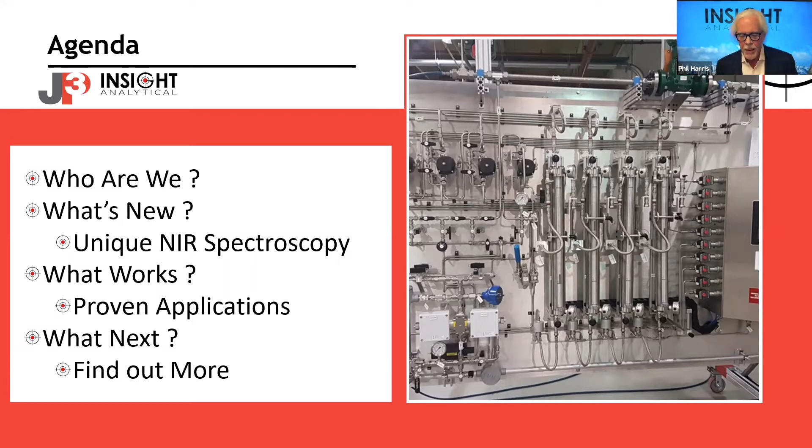So as far as who we are, as Chelsea said, there's kind of three players here right now, if you like. JP3 is, as Chelsea mentioned, a subsidiary of Flotek, and it's an equipment and information company that develops and sells online analyzers and data analytics. And so, they do a cloud-based data platform where you can see real-time what's going on in all of your processes that are being monitored by this technology.

And JP3 brought to the industry really a new kind of unique measurement technology that enables radical efficiency improvements, especially in applications where traditionally it's been difficult to put analyzers because they're being installed in remote facilities. Insight's a Canadian company and we work with them. And so a lot of our installations are up in the far north. There's not a lot of instrument technicians there. Often if you want a guy in, it's a 6 or 8 hour drive. So one of the unique things about this technology is the fact that it has almost no maintenance.

So Insight, we've worked with JP3 since 2013, I think. I started doing consulting work with them, and then we helped bring this technology to Canada. And Insight's a systems integrator, distributor, and a technology development company, and JP3's business partner. And as Chelsea mentioned, Making Measurements Matter is something we've been working to put together to try to bring educational seminars, webinars, and training to the measurement industry globally.

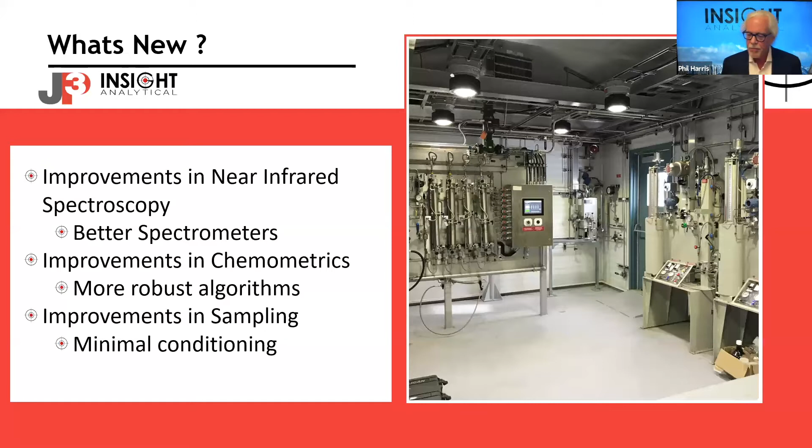So the first thing I want to talk a little bit about is just the type of spectroscopy we're using here. I'm a spectroscopist by trade, so to me, this always seems like it's second nature. But I like to try to put a bit of an explanation into this for how spectroscopy really works, and specifically how absorbance spectroscopy works.

Oops, let's change my pen color here. What color am I going to use to write on red? Oh, I'm going black.

Okay. So when we talk about absorbance spectroscopy, what we're talking about is shining a light through a sample, as I'm trying to indicate over here, and seeing how much makes it through on the other side. And so at first glance, you might think, well, if I wanted to determine how green something was, I would measure how much green light it transmits. But a clear glass window transmits green light as easily as a green piece of colored glass does. The difference is the green piece of colored glass transmits green light, but it blocks blue and red.

So when we look at something like some green food coloring or a green piece of glass, we see it as green when the light shines through it because it stopped the red and the blue. So this is what I'm trying to show here, is that it transmits green light and it blocks the red light and it blocks the blue light. So we can identify that something is green by looking at how much blue and red it blocks. And that lets us figure out what colors it's actually transmitting and how we would see it.

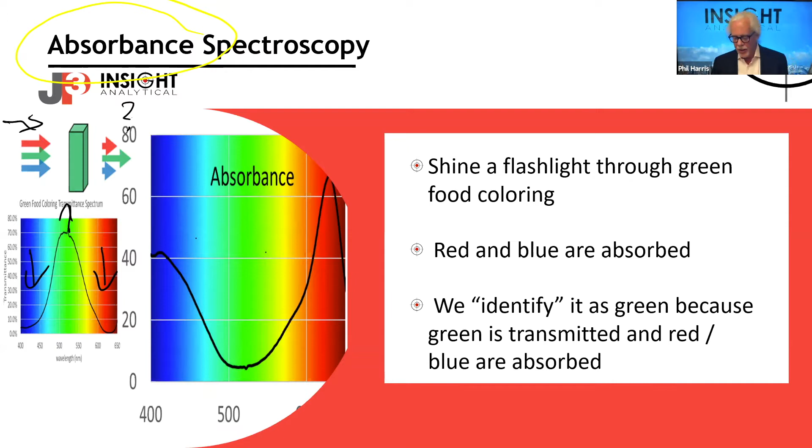The problem is when we start looking at some hydrocarbon samples like crude oils and things like that, they don't transmit very much visible light. So we have to start looking into different parts of the electromagnetic spectrum. We look at different wavelengths. And so what I'm trying to show here is that if you take something like, let's say, a crude oil, and you try to shine visible light through it, it would absorb and block almost all of that visible light.

This isn't a crude, it's a natural gas condensate, but it's a heavy condensate right off of a condensate stabilizer. And so you can see it doesn't transmit much visible light. It's very dark. But as we go beyond the red end of the spectrum, and we get into what we refer to as the near infrared, near because it's near to the visible, infrared because it's beyond the red, we start to get less and less absorption, and basically more light makes its way through.

And there's a couple of places where the hydrocarbons absorb light. But once we get out to about here at about 1600 nanometers, that's where all the magic starts to happen. We start to get all of this absorption of light again. And from the pattern and shape of that absorption, we can identify what hydrocarbons are present. And from how much of the light's been taken away, we can identify how much of those hydrocarbons are present. So we can do qualitative measurements, what chemicals are there, and quantitative analysis, how much of them are there.

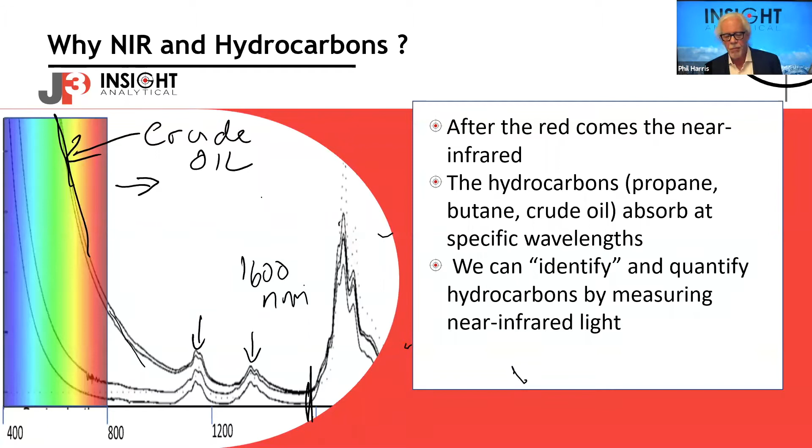So this isn't new, okay? Infrared spectroscopy has been around for a long time. Coblentz around 1900 built a big spectrometer the size of the room that I'm in, and he was using it to look at the infrared spectra of different hydrocarbons, and he was basically the first person to come out and say, as we change the shape and the number of molecules that are in them, the spectrum changes, and no two spectra are the same for two different chemicals. So we show an example up top of gas phase methane and gas phase ethane, and you can just see how differently structured their spectra are.

Around the 1950s, people started to try to apply this technology to actual process measurements, especially for determining water content in things like food, in things like oils. They would look at how much light gets absorbed by water at a certain wavelength and identify how much water was there. In the 1980s or so, fiber optics became more popular, and people started developing FTIRs or FTNIRs. FT stands for Fourier transform, NIR, near infrared. It was a great Canadian thing. There's a company out of Montreal called Bomem. They later got purchased by ABB, but they were a big foundation of the development of a lot of this technology.

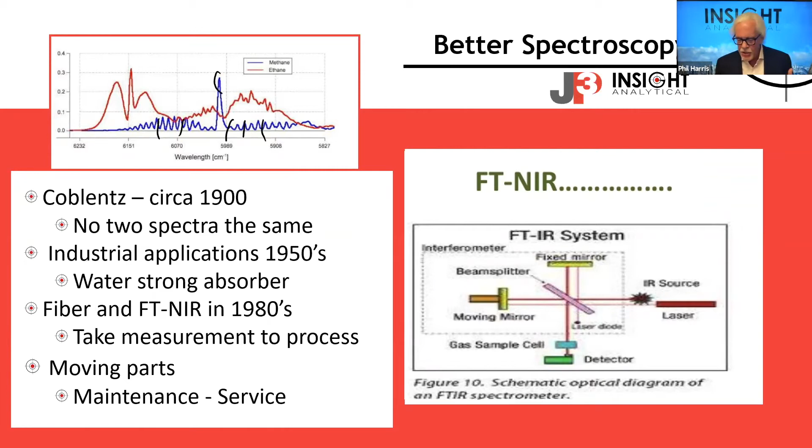And this led to a lot of work on distributed feedback type lasers and bright, intense light sources that were extremely monochromatic, all one color. They're extremely bright, and they could be mass produced to be very similar. As the telecom industry expanded, they said, we want to be able to run more than one color of light down the fiber. We want to be able to do different wavelengths. This is important to us because we want to look at different wavelengths or colors of light and see how much light's getting absorbed there. So the fact that they could tune these lasers meant that we could start to do spectroscopy with them.

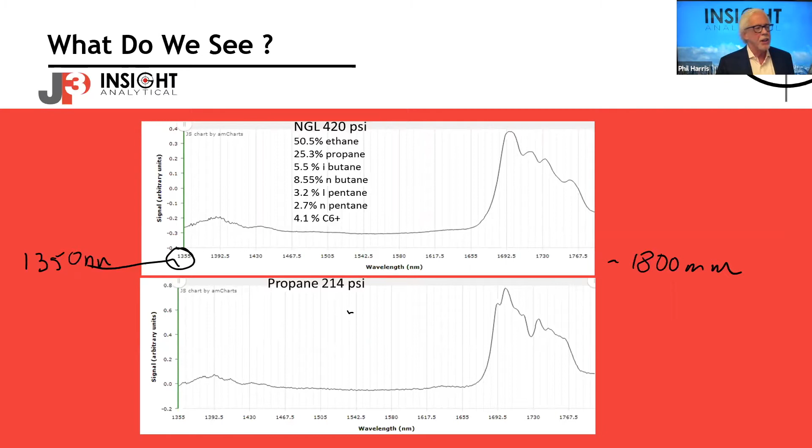Oops, I'm just going to go back for a second and come back into this, as I want to talk about this top spectrum. It's going to automatically update after about 30 seconds. So the top one is a sample of natural gas liquids. The bottom one is a sample of pure propane. And to the naked eye, our pattern recognition skills are pretty good. We can tell the difference between those.

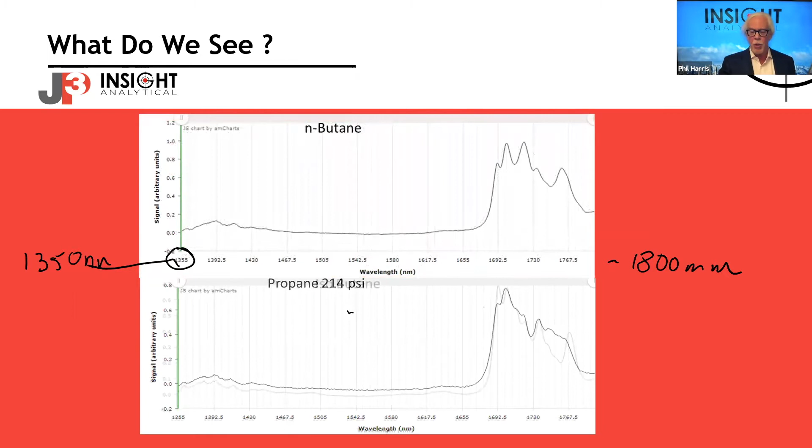You could look at those and say, I can tell the difference between propane and NGL. I can tell the difference between propane and n-butane. I can tell the difference between propane and isobutane just by looking at the spectrum. Where it starts to get complicated, though, is in the real world. We end up having samples that have a mixture of components there.

So now we end up with something like a stabilized condensate or a natural gasoline, and it has a mixture of chemicals, and all of those spectral features, spectroscopists often refer to them as fingerprints, all of those spectral features start to overlap on each other. And suddenly our naked eye visual processing isn't so good at determining what's there.

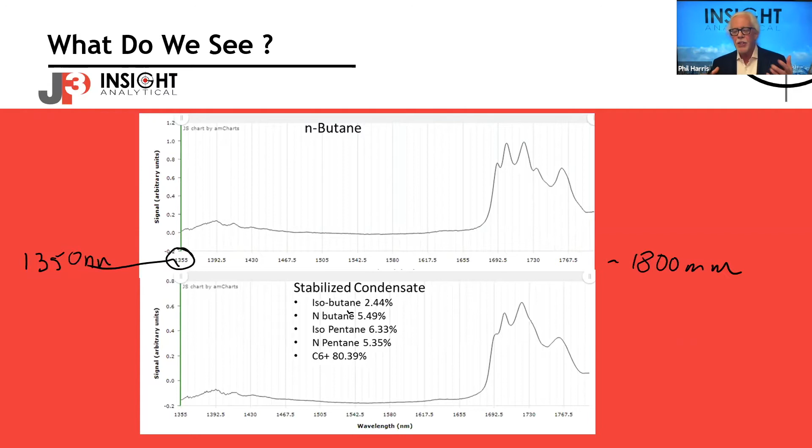But another enabling technology which has been developing over the last decade or two has been the things that we can do with pattern recognition. So in chemistry, we refer to it as chemometrics, and it is the art, if you like, of using numerical analysis, using the ability to look at patterns in data, and from that extract meaningful information. Chemical composition, physical properties.

So the enabling technologies that have allowed us to improve how the chemometrics is done has been the massive advances we've seen in computer speed. They talk about the speed of computers doubling every couple of years. My cell phone now has infinitely more computational power than the first personal computer I had. So we have these very fast computers.

When I was going to university, a long time ago, you don't get white hair like this for nothing. When I was going to university, artificial intelligence people were saying, well, we don't know if we'll ever fully be able to interpret human speech with a computer. Well, of course, kids' toys do it now. So we've seen this ability to take patterns and waveforms and make it into actionable data.

So that's what we do with chemometrics, is we apply that pattern analysis to chemistry. We use the spectral data, the shape of that curve, to determine chemical compositions and/or physical properties. So by combining the improved spectroscopy with better chemometrics, we can get better information. So those two pieces really enable us to take the spectra that we measure and make it into information.

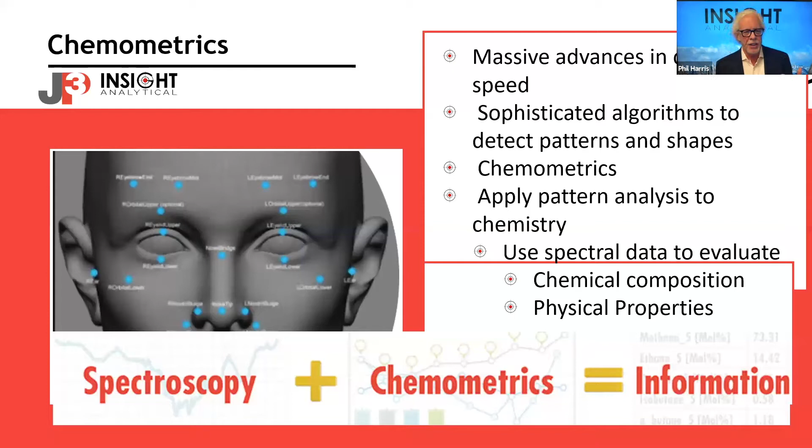But what we know in the process industry is that one of the big difficulties is, how do we get a good sample to the analyzer? And how do we keep the analyzer up and running? Sample conditioning. So one of the things we had to consider then also is, how can we make that whole process of having a sample flow over to the analyzer easier?

We say 80 to 90% of the problems that happen in analyzer systems are related to sample systems and trying to get the fluid to flow through that product. And so what we want to do then is try to minimize the complexity there. We want to minimize the amount of filtering we need. We want to minimize the use of regulators, valves, and small tubing.

That helps reduce all of our maintenance requirements, keep everything as simple as possible. And then we want to take that solution and close couple it to the process we want to measure. And that allows us to get faster response times. Faster response can often lead to better process control.

So what I'm showing here is a typical sort of analyzer sample system. And this is probably not a typical GC oven, but it's the sort of thing we see in GC ovens. There's a lot of small tubing in there, complex flow paths, potentially difficult to maintain. We certainly have to do a lot of training for instrument technicians to work on these things.

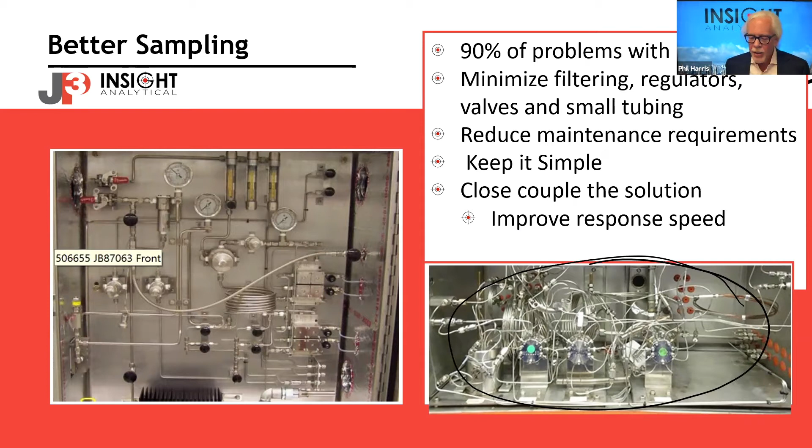So what if we could make this simpler? What if we could make it so that we have a flow cell that has all half-inch ports? So all of our flow paths can be on half-inch tubing and half-inch pipe. What this does for us is gives us large diameter tubing, large diameter piping that is going to be less likely to plug by the dirt and the wax that might be in something like this.

Inside that flow cell, we have ports so that the fluid we want to measure can flow through it. And into that flow cell, we put 2 sapphire cores. We use synthetic sapphire. It's the second hardest thing next to diamond. So I'm going to make sure I can see this. So this is an example of a cutaway of the flow cell.

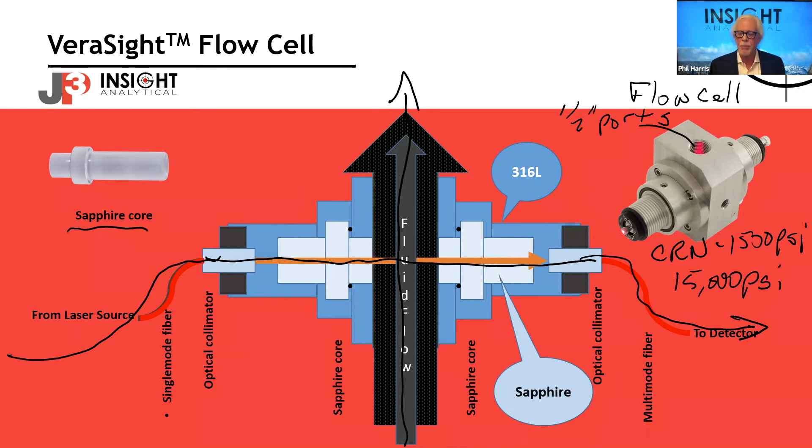So this lets us kind of change how we approach measurement, if you like. We take a process pipe, put a probe into it. We look for some source of differential pressure. This could be from an orifice plate, could be a control valve, could be a pump. It could just be a low pressure return someplace. We want to use process differential so we don't have any pumps in the system.

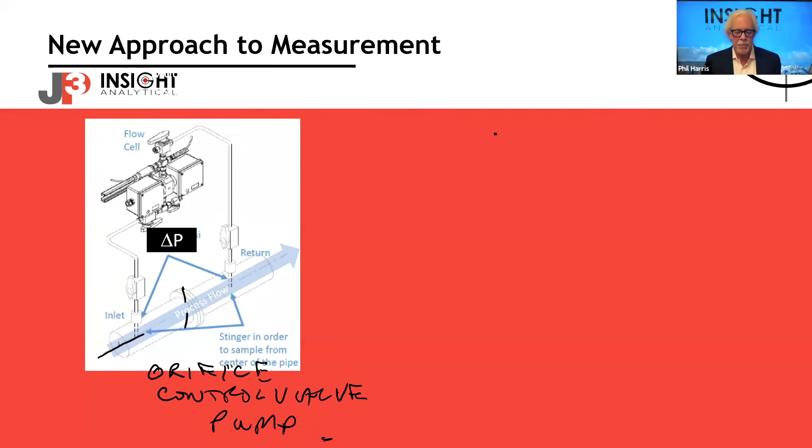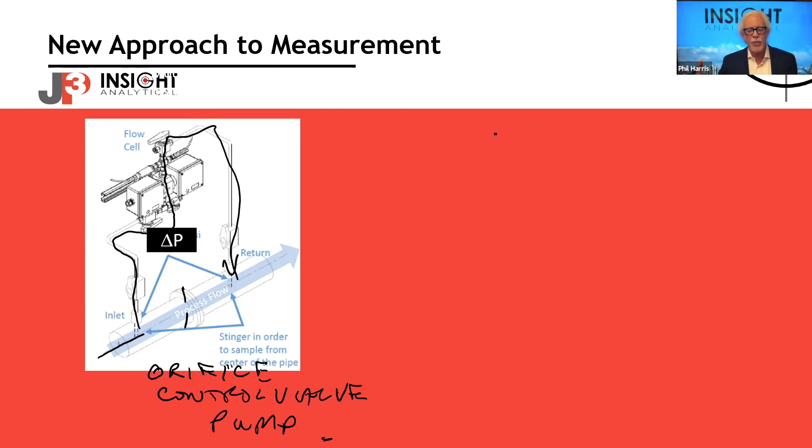We mount that cell as close to that process pipe as we can, and the differential pressure runs through some half-inch tubing and drives flow through that flow cell. So we have the flow cell, and then remotely, we mount this analytical device that contains a spectrometer, and we connect it by fiber optics. The fiber optics shoot a beam of light out through the flow cell and return it back to the analyzer. I kind of view this as where the actual measurement happens. It's where the light interacts with the sample, and this is where the brain is.

Because no process fluid runs back to where that brain is, we don't need any specialized analyzer buildings or shelters. We can mount this in an MCC building, in a control room, in a blending skid room, and put the brain part any place because we don't bring process fluid back to it. This minimizes risks to our staff. We don't have sour gas or sour liquids coming to it. We don't have hydrocarbons coming back to it, so we don't need gas detection and protection against possible combustion.

And so now we bring that information that happened when the light got absorbed by the hydrocarbon back over to the brain. We measure that spectrum, and we use those chemometric algorithms to convert that into actionable data. We look at that spectrum and we say, this is the chemical composition. C1 through C6 plus, C1 through C9 plus. These are the physical properties: vapor pressure, BTU content, API gravity, cloud point. We can do this in gases or liquids. The same technology can be applied to pretty much any type of fluid, from a light NGL to a natural gas to a crude oil to a natural gas condensate.

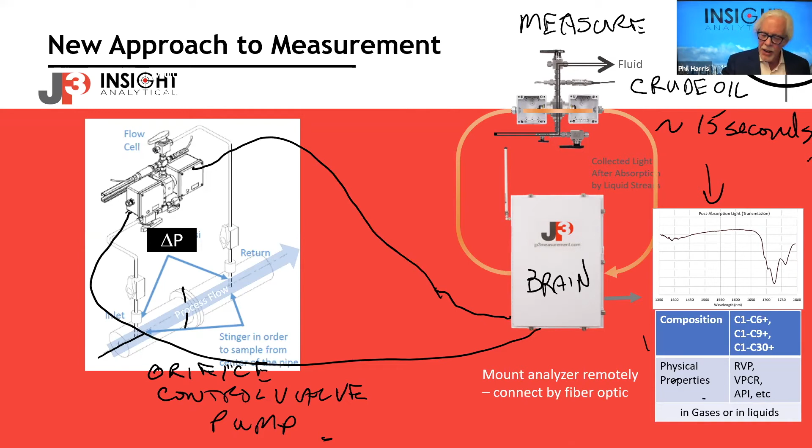Hi, Phil. Sorry to interrupt you. We've got a question in the chat. Okay, perfect. So I'm not sure who it's coming in as, Sandy one. So Dave, okay, not Dave. Sorry, guys. If this isn't clear enough for you, please pop off mute and just get some clarification with Phil. This is not my field.

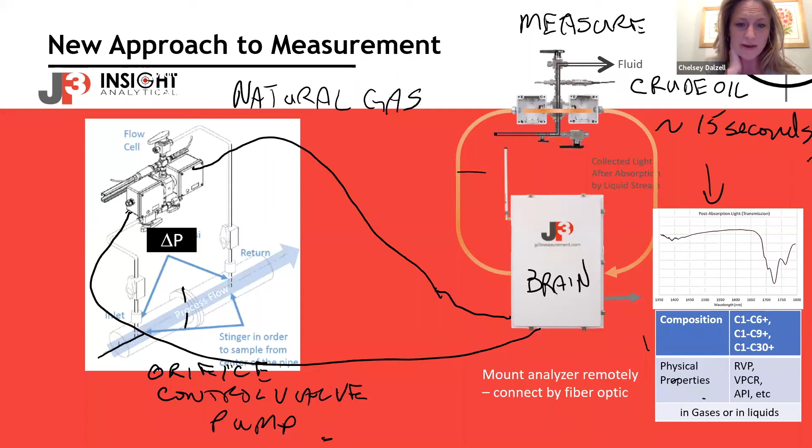So if delta pressure across the flow cell is higher than delta pressure in the main process line, how does the fluid return back? Yeah. Okay. So that's one of the things that we have to look at when we do an application review, if you like, is what's the pressure? I need to know the pressure at the sample point, call it P1, and the pressure on my return point, P2. And we need to ensure that P1 is always greater than P2.

Well, actually, I suppose that's not even really true. It's just ideal. If P2 became greater than P1 for some reason, we would just get flow in the opposite direction through the flow cell. But it's basically an unrestricted flow typically, without necessarily a flow limiting device there. Ideally, if we are going to put a flow limiting device like a needle valve in here or a flow restriction, sometimes we just run narrower tubing on the return side. We would put it on the downstream side for a liquid because we want this cell to stay at pressure. Keeps the bubbles in the liquid so we don't have any bubble issues.

We still have to look at applications. This analyzer is designed to make single phase measurements. So if you're going to do a liquids sample, it should be all liquid with no gas bubbles. If you do a gas phase sample, you prefer it to be all gas phase with no liquids there.

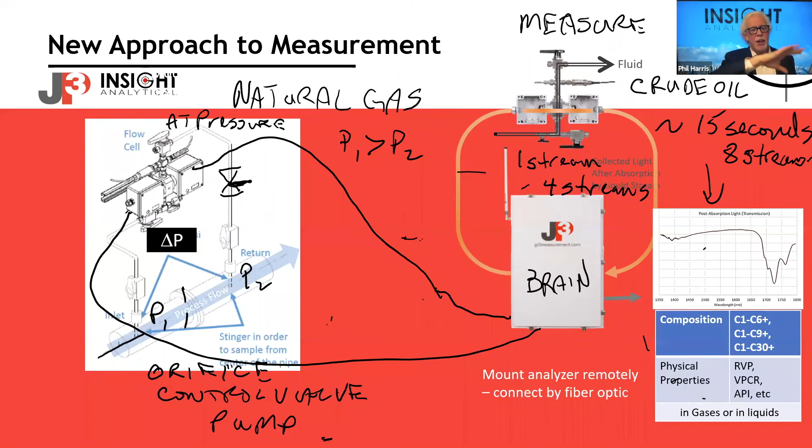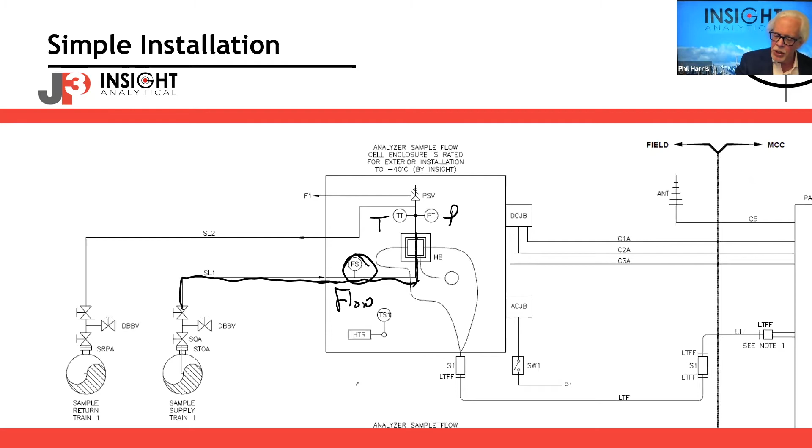So this ends up making our installations quite simple because we don't have a lot of equipment on the sample conditioning side of it. So I show a typical P&ID. Hopefully this shows up well over the screen; AutoCAD drawings and all those skinny lines are often tough. But we have a sample point here with a double block and bleed valve or assembly. We come in, we go past a flow transmitter, flow through the flow cell, we have pressure and temperature, and return back to the process. So that's our complete flow path.

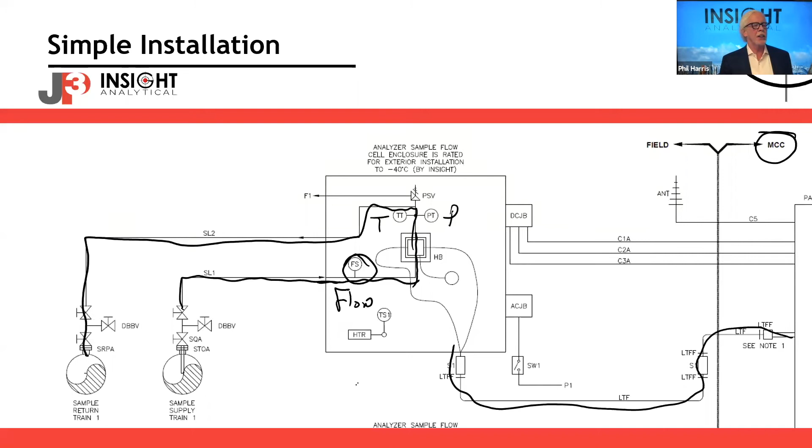Now we may add things on there like lab grab sample points, and that's typically what we do. So this is probably a simplified version of this P&ID, and I'm going to show you an actual cabinet in a minute. But then we run fiber out from wherever we put the analyzer. So our fiber optic comes in, and in this case we'll often put it in something like an electrical building, an MCC building, a control room, any place else. Again, no process fluid is coming back. All we have is fiber and some analogs and some digitals, so some communication that goes back and forth, and the fiber optic connection.

Oh, sorry, excuse me. Hit the wrong button. There we go.

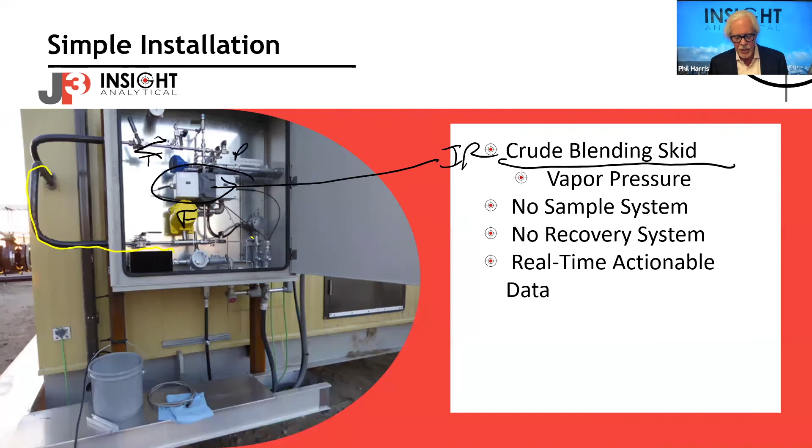So this crude is coming out. It flows past this yellow device that you see right there, which is our flow. The infrared cell is right here. Temperature, pressure up here, and then our return back to the process over here. So just to let you see this maybe a bit better: we come in on that bottom valve, flow past the flow switch, flow up through the infrared cell. You can see the fibers coming into it from either side. And then we flow past the temperature and pressure transmitter and return back to the process. That's our entire sample system for a crude oil blending application.

This particular installation is in South Saskatchewan in Canada, fairly heavy crude. They're blending depropanizer bottoms into it. It ran for 9.5 months. We were questioning whether they were even using the data because we didn't hear anything from them. Then my service technician gets a call on a Sunday night: we just lost data communications to the analyzer, can you help us figure out how to get Modbus communications going? The cell was never cleaned, and they're reading vapor pressure continuously, using it for continuous blending.

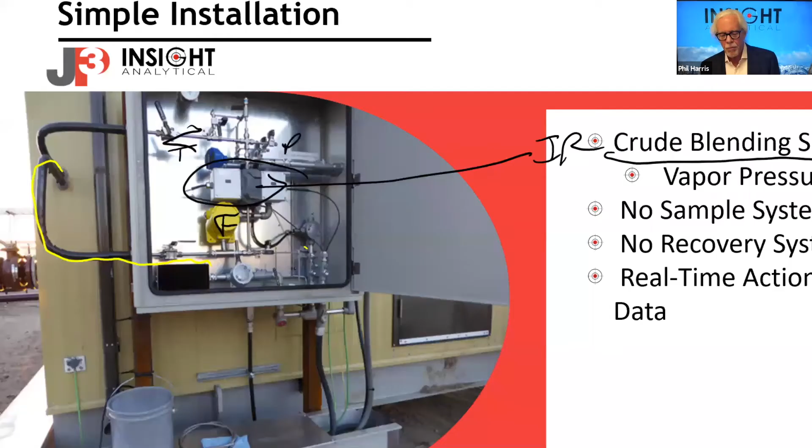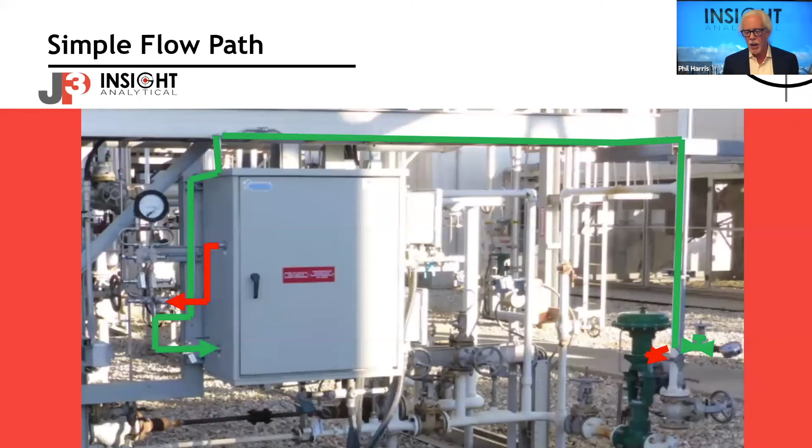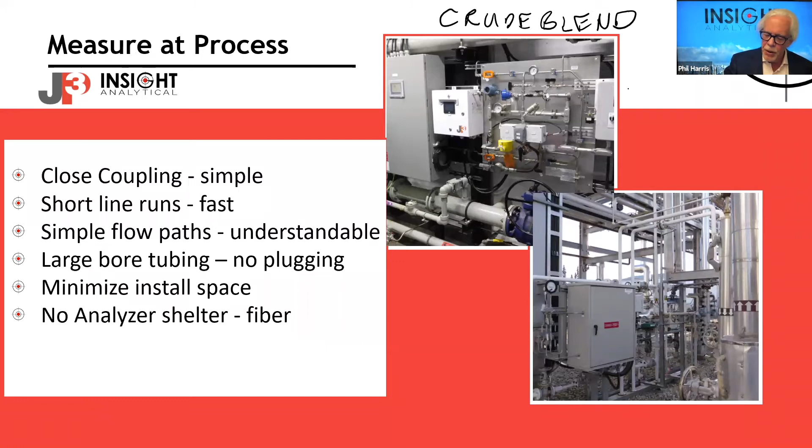We have crude oil flowing through this pipe down here. The infrared cell is sitting right here. We take a sample of that crude oil, run it through the infrared cell, return it back to process. And so we've mounted the analyzer and the flow cell as close as we can to that blending skid so that, again, they get real-time data to control that skid.

Another, this one's on a de-ethanizer. So the de-ethanizer tower is sitting right over here. We mount that panel as close as we can. Short sample lines, fast response time, less places for things to plug. So close coupling, keep everything simple.

Short lines, it's fast. Really simple flow paths for technicians to understand and look for any potential issues in. Large bore tubing, no plugging. Minimize all of our installation space, and we don't need any analyzer buildings. No fluid is running back to the analyzer.

Put that picture of the mountains up because I was out in the mountains this weekend and you got to see all the snow there. And I know we invite a lot of our colleagues from the Middle East to this.

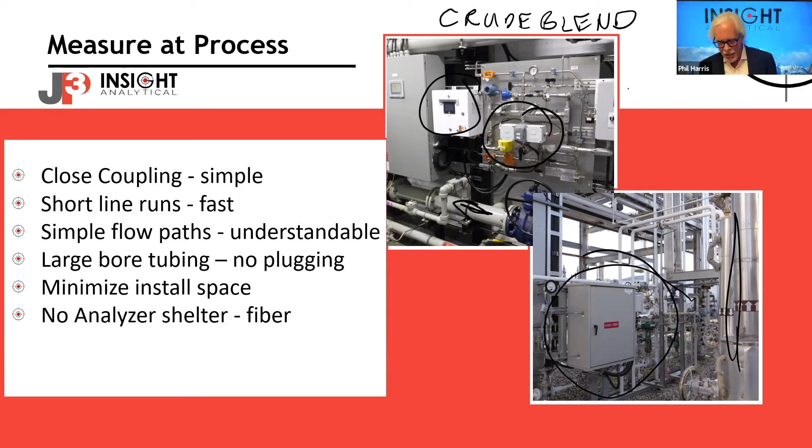So this is another installation out in Canada. And so again, you see there's that cabinet sitting out there in the middle of the snow. You open up the cabinet, very similar to the other one we had. Flow transmitter, infrared flow cell, pressure, temperature. A couple of bells and whistles, features added into this one. So sitting out there right in the middle of the plant.

The analyzer is mounted over here in an electrical room, MCC building. Analyzer mounted on the wall. Inside the analyzer, we have the spectrometer down here. We have a PLC that we use for all of our data communications. And there's a single board computer in there. I'll just take my ink off of here and zoom that for a second.

So it gives you an idea of, again, there's a lot of intelligence and a lot of capabilities in this device, but from a complexities perspective, we have a PLC, we have a single board computer, and we have this tremendously intelligent and fast spectrometer. And we take all that, we mount it in the MCC building. You can see there's electrical connections and fiber optic connections coming down in from the top of the cabinet.

And this one's on a condensate stabilizer. So it's running heavy, thick, waxy condensate like this. This is a facility where they've had lots of problems with analyzers because the wax content of the high molecular weight alkanes in these condensates in northern Canada tend to plug a lot of sample systems off. The wax just builds up over time.

You can actually see we put a little heater around the cell. We put the cell inside of a heated box. We keep everything above the process temperature by a bit, and that prevents us from getting those wax issues.

Excuse me, Phil, there's a question in the chat. This is from Guy. Is it a pre-configured PLC, or can you put this into an existing PLC?

We pre-configure the PLC to add in all of the hooks, if you like, for how to communicate to the spectrometer. And also it does all the Modbus communications, say back to your DCS or your PLC or any other control systems. However, we can also add customization to that.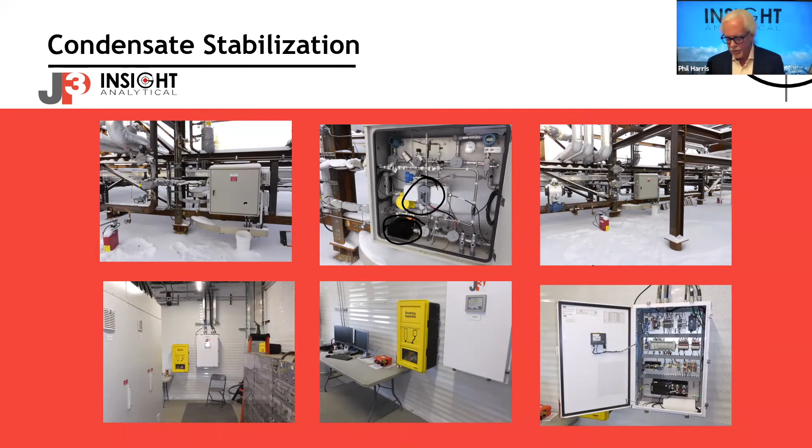We can use these on multiple streams. So this, again, is another Canadian installation. 4 streams: condensate stabilizer bottoms, nasty, dirty condensate like this stuff. Debutanizer bottoms, which tends to have similar chemical composition, but all the clays and waxes are gone, so it's nice and clear. Deethanizer bottoms and a C3 plus stream going over to storage. One analyzer that you see on the wall over here.

So there's our brain. Oops, sorry, pen's not on. Here's our brain over here. So if we just zoom in on this guy.

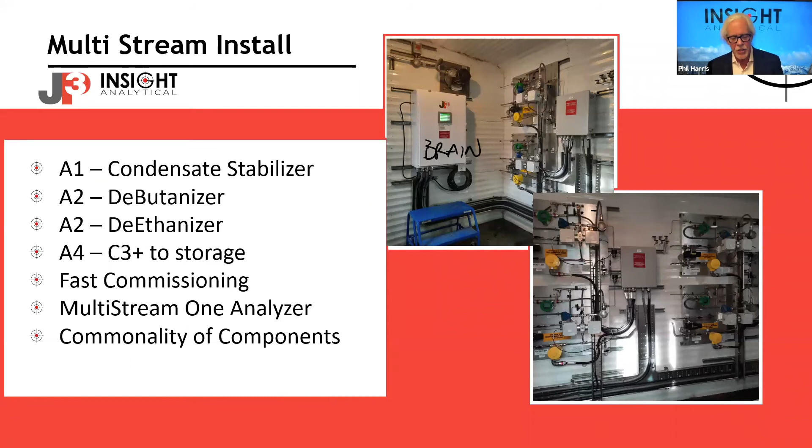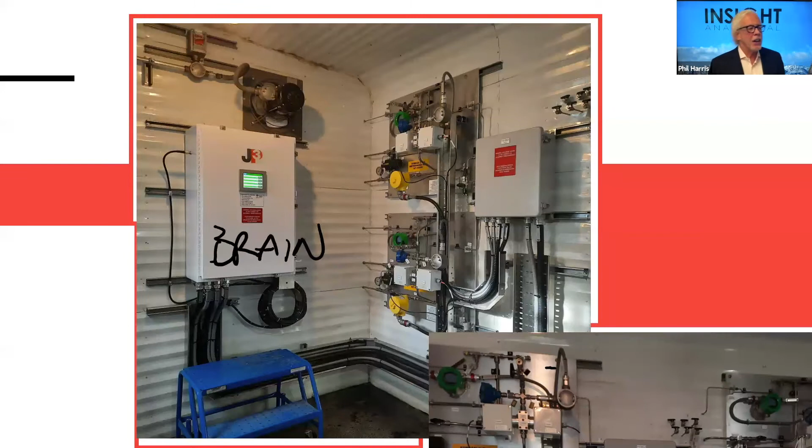Yes, we've got one more question in the chat from KC. Can the analyzer withstand potential exposure to seawater? In the flow cell, certainly, the flow cell construction in all of our flow path is 316 stainless steel, synthetic sapphire. So the materials that come in contact with process fluids are certainly going to be resistant to chloride-based corrosion. NACE is a big thing for us. So if you're talking about, say, a briny crude that occasionally had slugs of seawater that came through it, it's not going to measure when the seawater is going through it, but it's not going to do permanent damage to the flow cell.

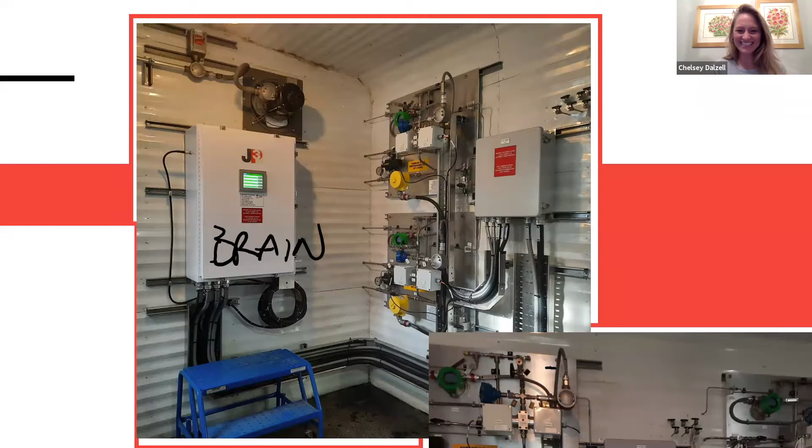Awesome, thank you. Okay. Oh, one more, sorry. NACE, I see it. Yeah, thanks, Chelsey. I got my other window with the chat up right now.

So NACE is kind of a funny thing. NACE is often a self-certification thing, right? For NACE, we provide a certificate of conformance. We use all Swagelok components in there.

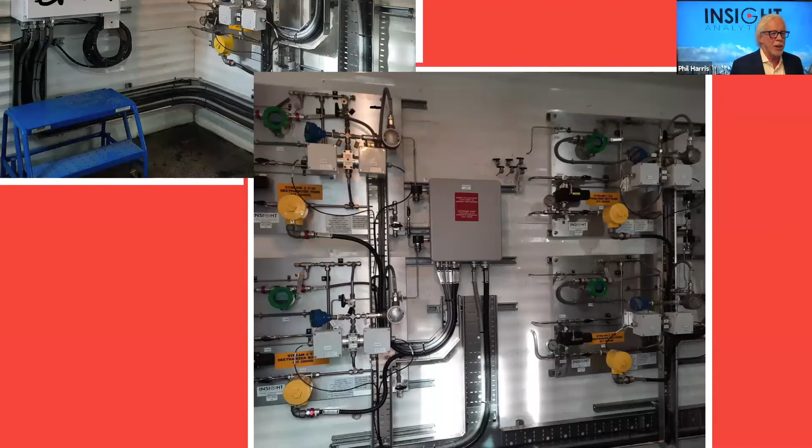Cool. So you can see we've got the brain over there, and then we've got these panels on the wall. Oops, over here. I can't draw when it's up like that. And so this next picture just shows that there's 4 panels sitting there. Each of those are the flow paths for a different one of those streams. And so we are measuring all 4 streams with the one analyzer. We have it mounted in the same building in this case. We didn't put the panels out at the process point because the customer said, we're already bringing process fluid into this building.

So when we look at the comparison of how things have been done traditionally, with the near-infrared technology, we can measure right at the process instead of transporting a sample and measuring it remotely at an analyzer building. We measure at line pressures and temperatures, which reduces our risk of phase change. If we put some complex sample conditioning systems in, we always have the risk that as we go across a pressure reducing device, or as we try to change temperatures, that we're going to have a phase change.

All of our flow goes through 1/2-inch tubing or pipe on the NIR side, whereas the 1/8-inch or 1/16-inch tubing we'll often see on conventional analyzers. No filters and regulators, no things that plug. We had a client who had an online vapor pressure analyzer and a chromatograph to measure, again, a dirty condensate. And he estimated his spare parts cost was $50,000 Canadian a year, plus the service time, changing filters, changing injection valves, cleaning components, etc. We get very fast response time, which can give us better control.

We can make multiple measurements. We can use one analyzer and be doing a chemical composition analysis like C1 through C6 plus, and a physical property like API gravity or cloud point or pour point, or there's several physical properties that are well correlated with the near infrared, one of those being vapor pressure, which is a very common one that we do. We can mount the analyzer anywhere. We don't need a dedicated analyzer building.

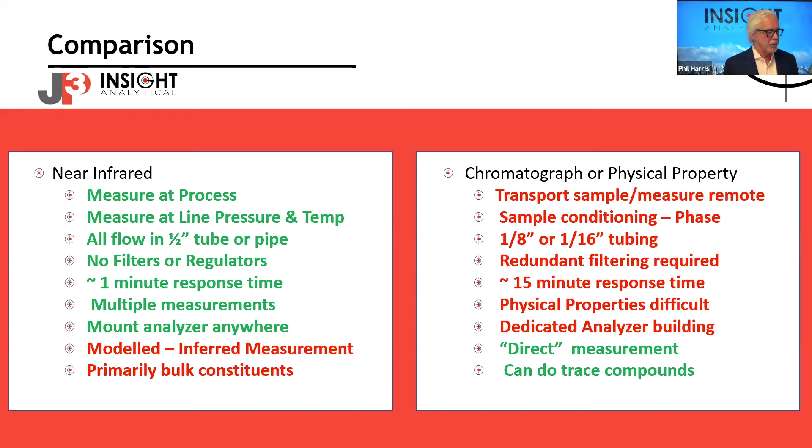So from an applications perspective. Yeah, we have two questions. I'm assuming that's Verlesh Desai. Hi, Verlesh. I can't see the whole list here.

Can it address all of the applications typically done by a GC? Not necessarily. Depends which ones we're looking at. Like on an ethylene furnace, you might be looking at things like trace acetylene and ethylene. It's a common application for people to look to see if they're running their crackers well. So the trace component measurements would probably still be done by a GC or by something like a TDL.

Again, we're typically doing bulk compositional analysis. So we could probably be looking at the ethane, ethylene, propane, propylene splits, but we may not get to some of the trace components like ammonia, sometimes of interest in ethylene crackers, or acetylene. Those are probably still going to be done by another technology.

Phil, did you get the one above it as well? How about C6 plus measurement? If yes, what is cycle time? Yeah, I can actually show some data on the next slide where we go all the way up to C12. And so it's a really interesting application. So I'm going to address that question with the next slide, if that's okay.

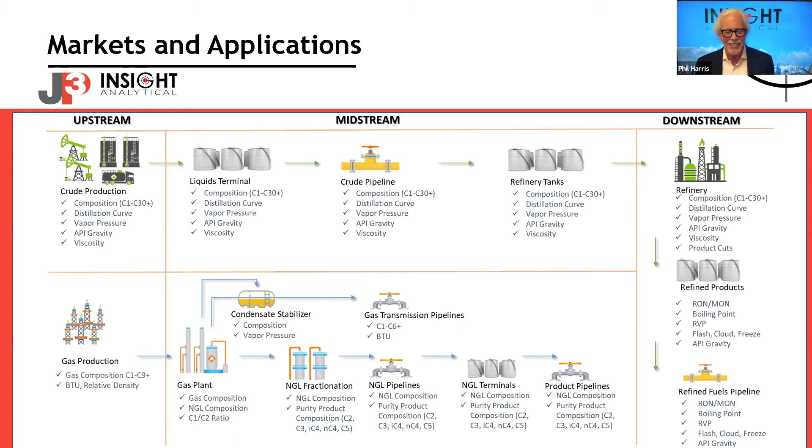So, you know, it always seems that when you get your first application, there's got to be something that makes it interesting. So one of the first applications we did, an engineering company in Canada had come to us and said, we have a client and they want to measure butane in their natural gas condensate. So our quote was all based around, we're going to do a C4 measurement for these.

I got a frequent calibration question. I'll address that one as well in a minute.

So we get it out to the client site and we talk to their process engineer and their measurement engineer, and they say, well, yeah, butane in condensate's the spec we have to hit. But what we would really like to get is a full C1 through C12 analysis. So from methane out to dodecane, and vapor pressure. And we'd like to do all of that on the same analyzer, please.

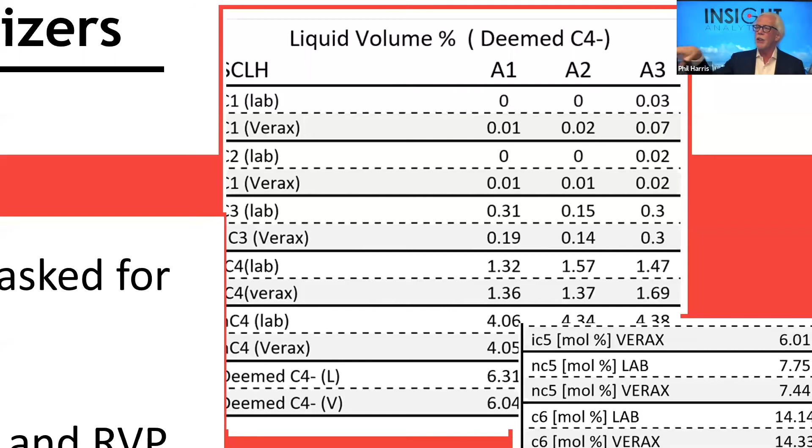And so you can see, there's always differences from analyzers compared to labs. There's noise in both measurements. There's repeatability issues in both measurements. But you can see we have very good correlation across the board generally on the C1 through C4s.

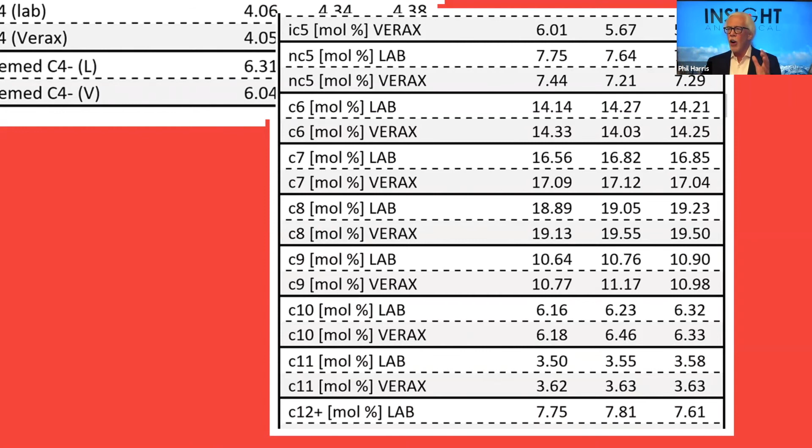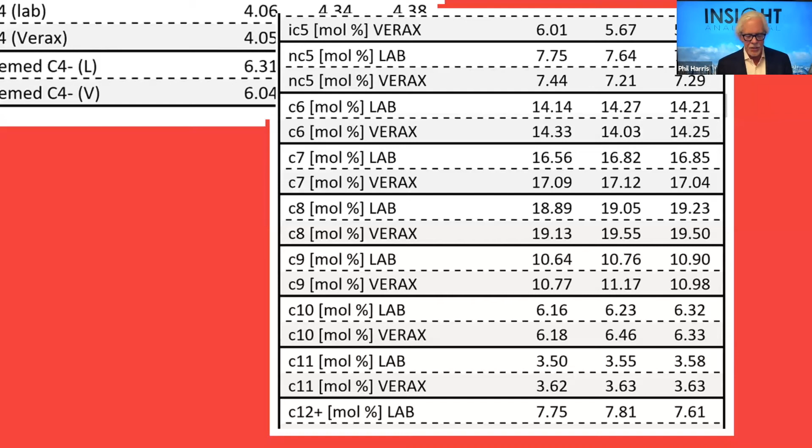And when we take a look at the measurements going all the way out to C12 plus, we see that again, we have very good correlation on all three trains to what the lab was getting as compared to what we're getting on the analyzers. And we do all this analysis in 30 seconds. So the question was, how fast can we do a C1 through C6 plus? In this case, we're doing C1 through C12 and RVP in 30 seconds.

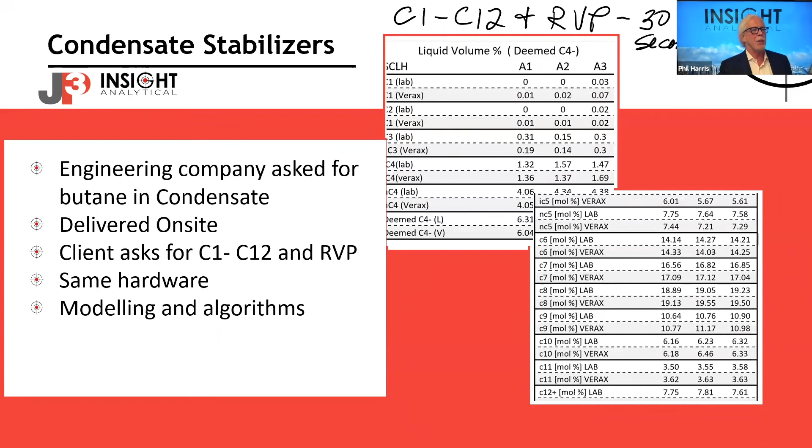So this analyzer that's at this facility is actually measuring their condensate stabilizer bottoms and their deethanizer bottoms. We do a C1 through C6 plus on their DE, C1 through C12 on their condensate stabilizer.

As far as calibration frequency, so as I mentioned, we build models. And we do that by pulling lab samples.

Oops, that place doesn't want to let me write. Oh, funny.

We do that by pulling lab samples. And so once we've built a model up, the analyzer runs statistics that look at how well the data processing is fitting the curves that it's seeing. And so we get that statistical analysis, and it allows us to say, well, the fluid we're seeing looks like it still fits within the model space. So we don't have to do any recalibration at that point.

When we do recalibration, typically what it means is we pull additional lab samples, get them analyzed, and use those lab samples and the spectra to update the models.

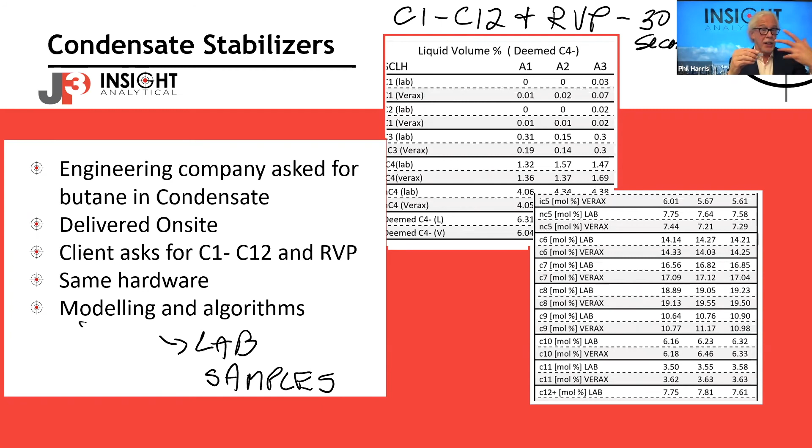The laser is quite bright. And so when we get a coating on the surface, it blocks light, but it generally blocks all wavelengths of light pretty much equally. It doesn't give us that pattern that we see associated with the hydrocarbons. So what we see over time, if the windows are getting dirty, is the light intensity starts to drop and decrease. We constantly measure that so we can give you a warning that says, your light intensity is decreasing, your flow cell's probably dirty. Somebody should go out and clean it.

It's really 4 bolts on either side, and you can pull this flow cell apart. My technicians in the field generally keep some brake fluid around. Sapphire is the second hardest thing next to diamond. You're not going to scratch it. So they take a cloth, brake fluid, clean the windows off, put them back in. Does not affect calibration.

Awesome. We've also done systems where we had a client who said, I don't have somebody there always to do that. So he was worried about wax buildup on the windows. So we built him systems where it monitors the transmission on the flow cell. If the transmission drops too much, it back flushes the system with toluene to get the wax out and then goes back to measuring.

Brilliant. And then Verlash, does the analyzer do the switching of samples, or does it have to be done by customer's DCS? Does the analyzer identify which stream it is analyzing? Yeah, so we typically set it up. The standard configuration for a multi-stream analyzer is that the analyzer switches from which fiber optic it's measuring off on a time synchronized basis. So it might be saying, okay, I'm going to measure stream 1 for 30 seconds, stream 2 the next 30 seconds, then stream 3 the next 30 seconds, then stream 4.

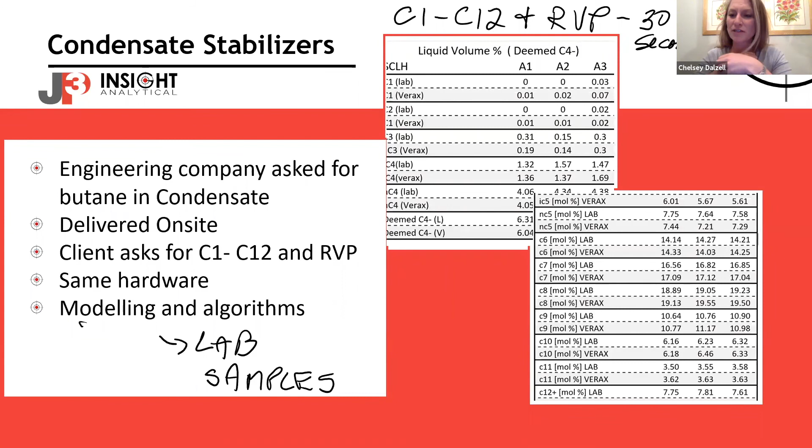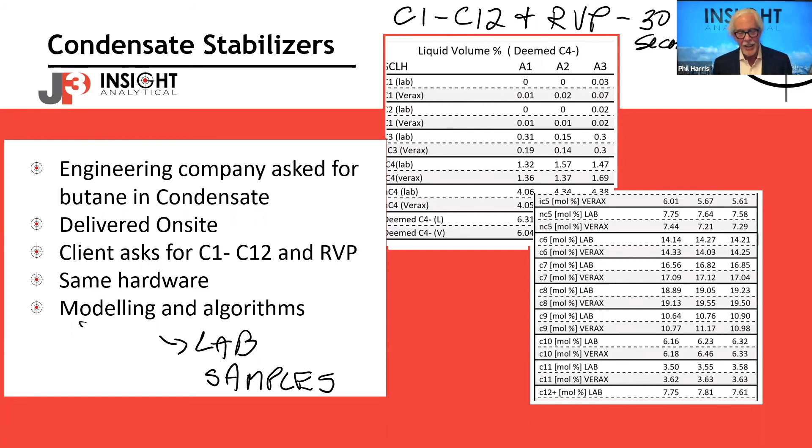I'll just address it. Usually we do all the chemometrics, Ravi. JP3 keeps a fleet of chemometricians on hand, and we have cellular communications on all the analyzers, so we can pull data in and build models remotely.

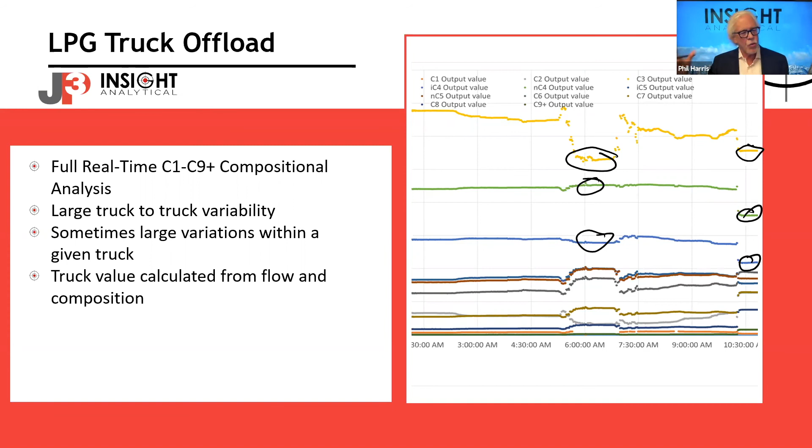Here's a truck offloading that is fairly low in propane, but reasonably high in the butane, compared to the next truck that came in, which had almost similar propanes, much lower butane values. And so what they're using this for is, what's the value of that truck? I get a full C1 through C9 plus, they update once a minute, they take a flow number once a minute, and they construct a flow weighted average of a 1 hour truck offload.

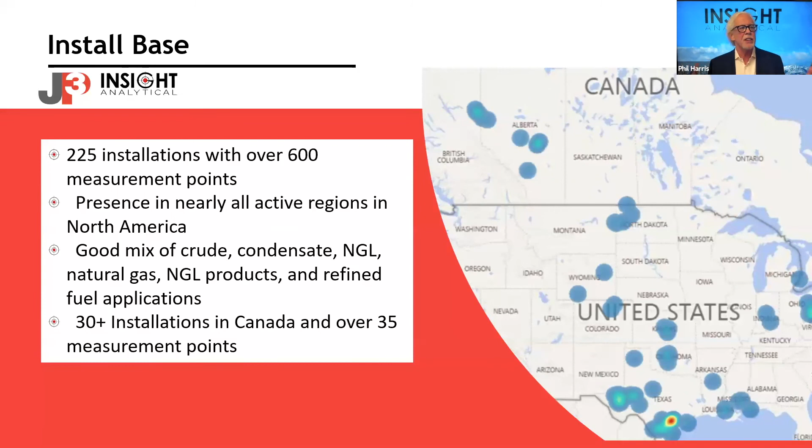From an installed basis perspective, there's about 225 installations and over 600 measurement points in North America, all active regions and basins. As we mentioned in the email, JP3 has been strategic about this and said, we're going to install these applications close to home where we can support them, get data across a number of different basins, and is now beginning to take this out to more international markets.

So typical things that we'll see, again, I'll go through these fairly quickly. We'll do natural gas plants. So we can do everything from the rich field gas coming in, the dry sales gas, condensates, what in the US they call Y grade. Up here we call a C3 plus stream or an LPG stream. So we can typically handle most of the products that are being produced there.

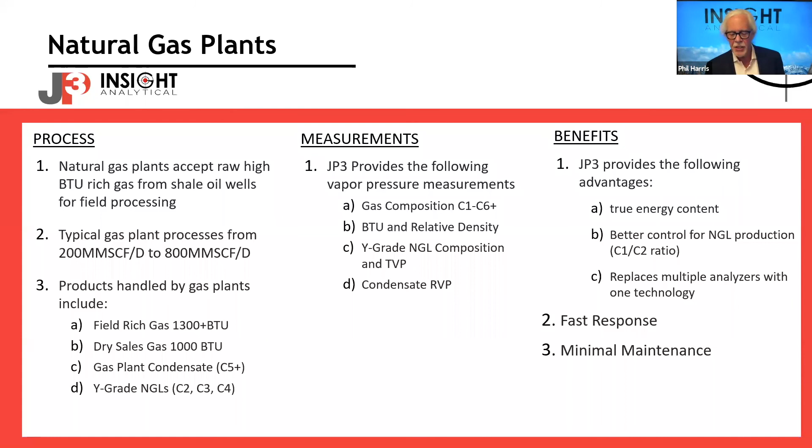If there's a depropanizer or a deethanizer there, we can handle the bottoms and the overheads of those. Typically doing a C1 through C6 plus, BTU, relative density, vapor pressure measurements. Big advantages are energy contents, fast response, low maintenance, replace multiple analyzers with one technology.

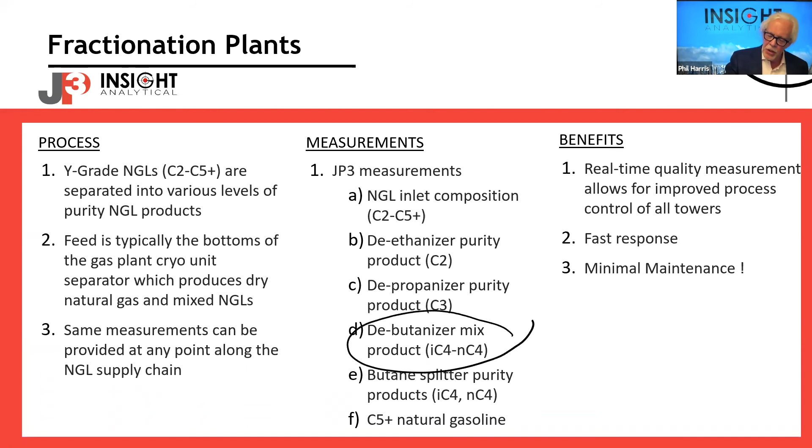Frac plants, very similar things. We can do the NGL, the natural gas liquids coming in on the inlet, deethanizer, depropanizer, debutanizer purities. We can look at the butane splitters. We can look at the C5 plus streams. And again, it's this low maintenance thing that a lot of our clients look at and just go, it just means I can have my instrument technicians working on some of my other problems, and this one just runs. And especially things like looking at your debutanizer mixes and your C5 plus streams, a lot of these are some high value products.

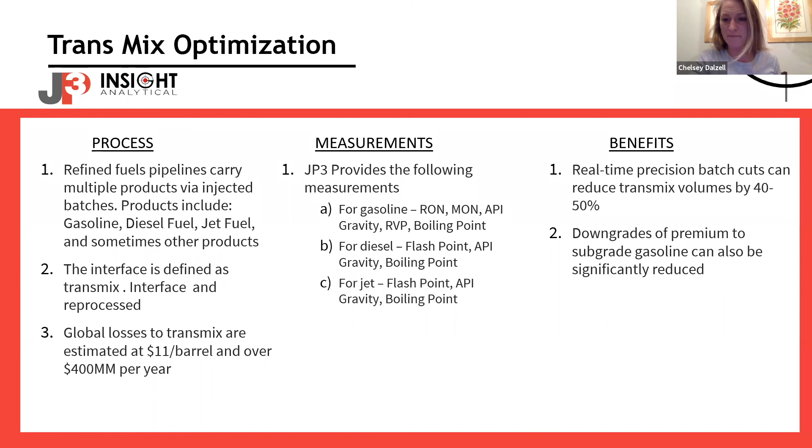So I'll mention here that we do a lot of work with transmix. We look at products flowing down pipelines. And so the big thing here is that there's a transition between two components. And so we can use the analyzer to monitor, are we on spec for component one? We go off spec as the two are mixed. Are we on spec for component two? The stuff that's off spec, we're putting to storage, and so that has to be reprocessed. So there's a lot of money to be printed by optimizing transmix.

Couple of questions. We can't build models based on customer data or customer compositions. We build models based on field results. You could run redundant fibers. Generally, it's like a premature failure thing. If they get damaged during installation, they have to be replaced. Once they're in, we've had very few issues where we've had to go out and replace a fiber.

TVP versus RVP. We can do VPCR4. Basically, whatever lab result you give us, we can build the model from the spectral data to that lab result. So if you want to do TVP and you've got good lab data, fine. The problem with TVP, especially as some people define it, VPCR at a very small overhead volume, is it's not a very repeatable value as compared to something like VPCR4. So VPCR4 at 4 expansion volumes tends to be a lot more repeatable than if you try to go down to where that vapor pressure versus volume curve is really spiking up.

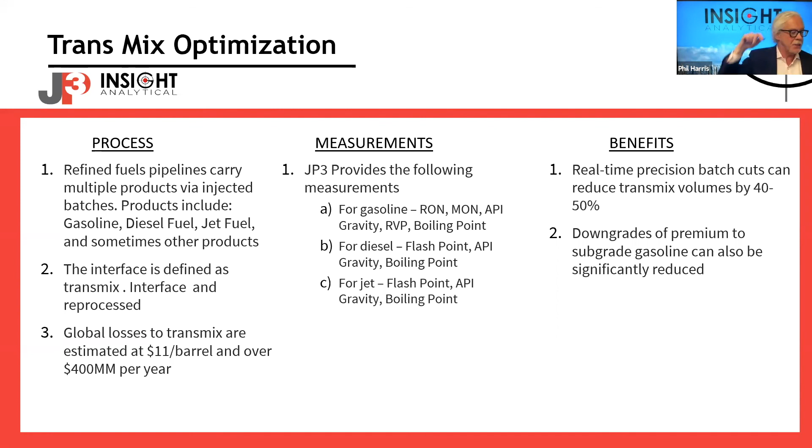Truck and rail, so real-time composition data of fluids, as I showed, going onto rail cars or onto truck terminals. So one analyzer can be measuring at each truck bay. Just put multiple fibers out there.

I'm going to come back to the calibration frequency question. Great, thanks. So I'm close to wrapping up here. Actually, I'll do it right now. So no, we don't do an actual calibration ever. We measure spectra, we look at how well they're matching to the model, we pull a lab sample and compare it to how the analyzer is reading to validate that the model is still working. Currently, I don't know of, and again, JZ, you're going to know, or Greg, you may know, I don't think there's one where we've actually put a calibration cell in there.

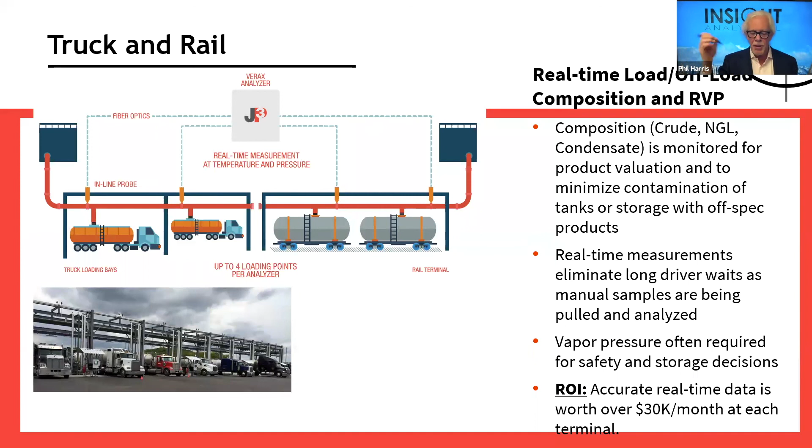We're currently doing multiple applications across all the major basins in North America, but we certainly are aware there's more applications for this technology. So we can put these pretty much anywhere across the hydrocarbon processing industry, certainly from natural gas liquids, crude and refined fuels, and a lot of the fractionation fluids that we make from those.